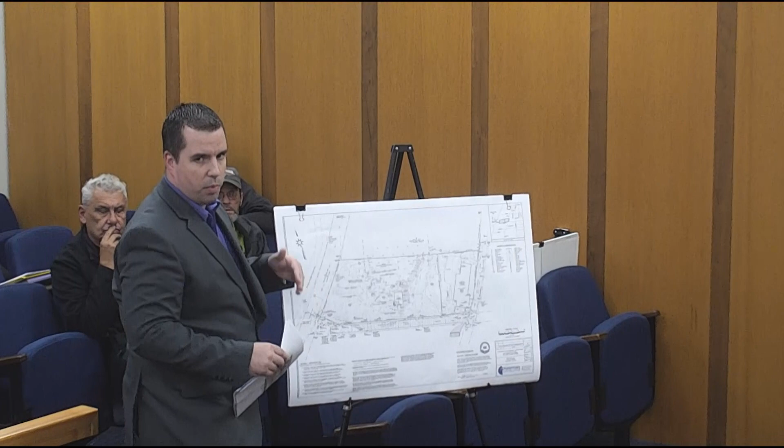I printed out a few prints, if it'd be okay, I'd like to show you some photos and stuff like that. So I have the overall plan, very similar to the plan you probably saw at the last meeting. I wasn't really privy to some of the last meetings, I know George has been here a couple times. I did watch the recording of the last meeting just to get a sense of what was going over, but I can explain some of the work we did since the last meeting.

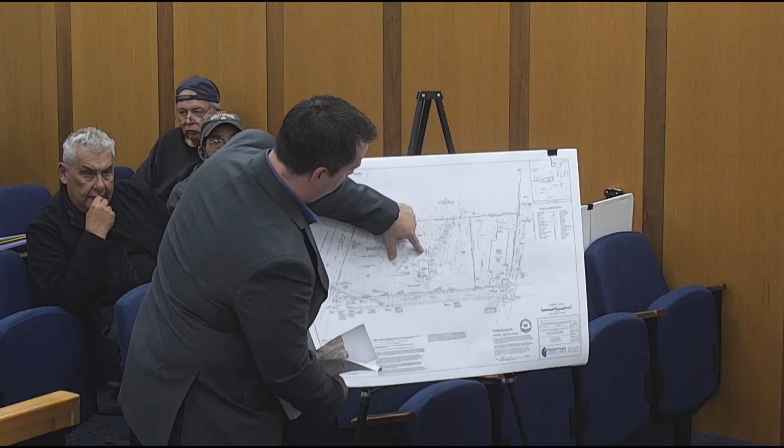Let me turn to a blow up. This is the overall plan. This is where the sealed culvert is, the 30-inch culvert. We did shoot an invert elevation, 29.84. The pipe does head in this direction, kind of towards the corner of the garage, and heads towards this end of the street.

To give you a little history of the property, I do have a photograph from 1939 of the property, just after the '38 hurricane. They did some aerial photography. That garage right there is actually the garage that's still on site. So it's in pretty rough shape, you kind of don't want to go in there.

Most of the time I've been on site, you go in that building, there's probably a foot of standing water all over the place. That culvert is flowing. And the manholes in the street, we've opened all the manholes in the street, the ones that we could find, and those are flowing. I'm of the opinion that it's tied into the city drainage.

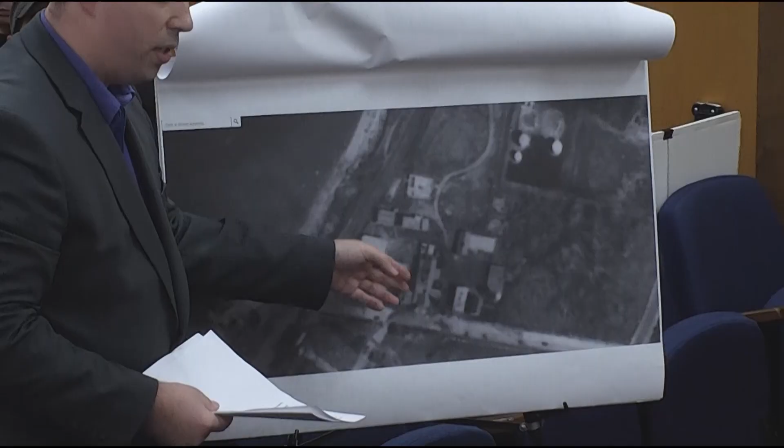We didn't find any kind of outlets on site anywhere. We didn't find any kind of outfalls at the beach. Back in 2017, we did locate that stone culvert under the railroad tracks, a blow up of it right there. I do have a photograph of that.

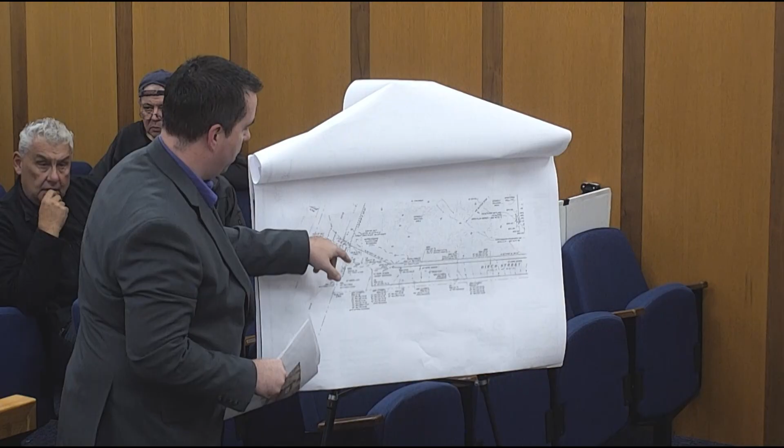At the time, you can see the 20 contour. It's kind of like a bowl in there with a low spot in the middle. At the time, this was around 11.8, going out was around 11.5. That grade's up around 20 now.

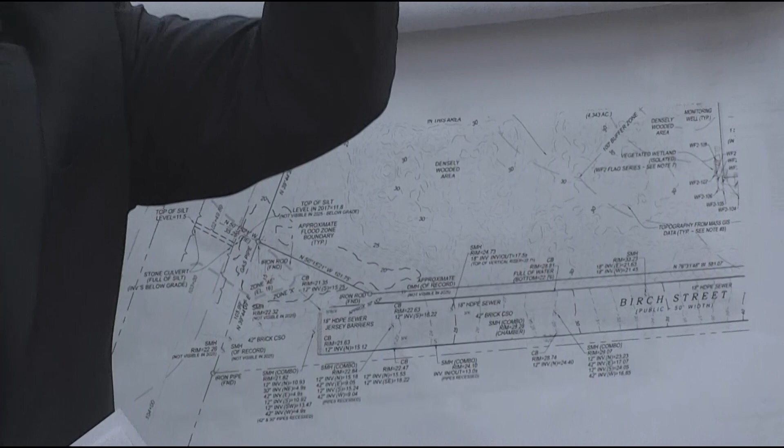I remember when we were out there in 2017, you could walk up to the railroad tracks and probably 10 feet above your head was the top of that railroad wall. And you can see that culvert. I don't know the size of it, maybe a 48-inch culvert, but there was probably only about 6 to 8 inches of it showing. It was all silted in, you couldn't even get anything underneath it.

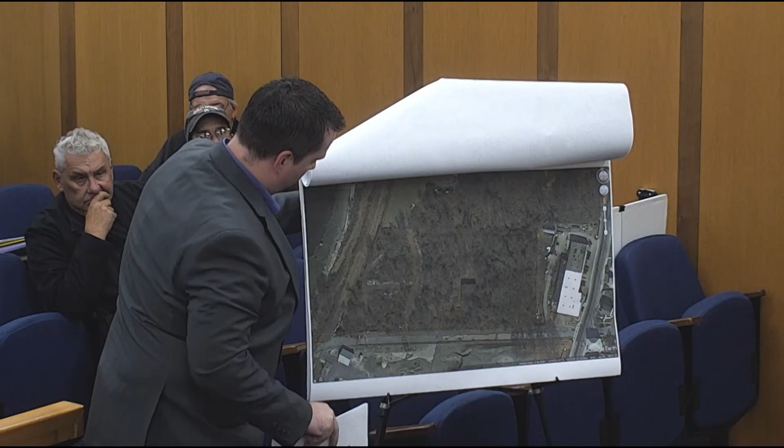I have some photographs of that. Now you go out there, and you can stand at the top. There's riprap that travels that whole area, and you can pretty much sit on that railroad track wall, when before it was 10 feet above your head. So you can see, that was 2018. Our survey was done at the end of 2017 or so.

We show the gas line. You can see in the photograph here, you can actually see that stone right there. That's the culvert that goes underneath.

And then around 2019, you can see all that riprap in there. So that whole area was all filled in along with the grades within Birch Street. A lot of the manholes we show on the plan that are off-site towards the water are actually well below grade now, by some areas by feet.

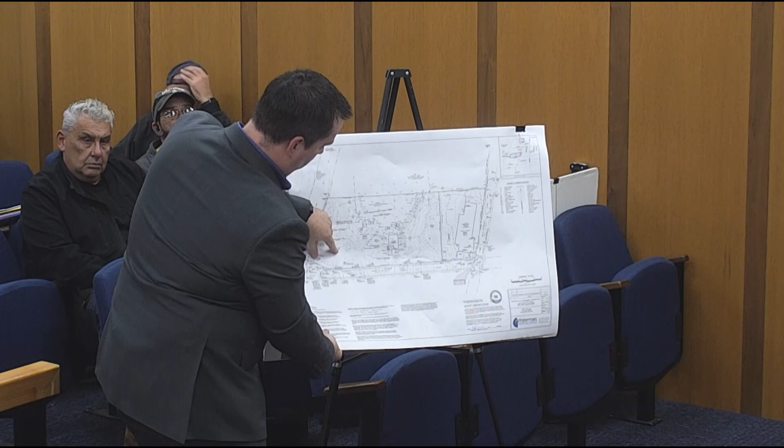This is the manhole behind the Jersey barriers. There's a manhole close to being on site. It's tough to tell if it's on site or within the street right of way itself. In this area, it's shown on those city drainage plans for the sewer separation for the CSO project. We staked out the location of that manhole for them to poke around and see if they could find it. They weren't able to find it.

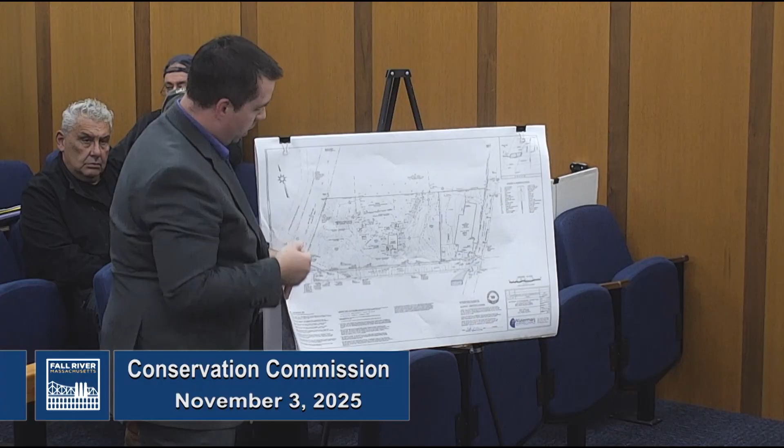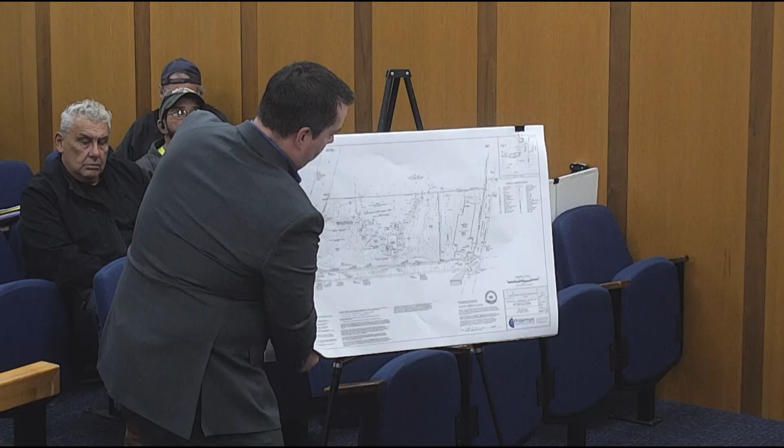Looking in the manhole behind the Jersey barriers, that's what it looks like. There's a pipe that comes this way, a pipe that comes this way - these are the two pipes from the catch basins in the street. And supposedly there's another pipe that comes from this direction. But this is atypical, usually that's nice and wide open so you can see what's going on. It almost looks like a structure was put on that, like Fred said, and kind of just smashed out the middle of it.

So I think the whole purpose of this in general is just to give you a sense. Those are some photographs of that gas pipe from 2017. That riprap and the grade that's out there now is well up into here somewhere. These railroad tracks that are there now, you can hardly find them. You're up to brush like this, and a lot of this area has all been filled in.

Get a picture of what it looks like now - this is what it looks like before, and that's a photograph now, same angle. You can't even see where that culvert is. That culvert's probably 10 feet below grade in that location.

So the whole purpose of the ANRAD in general is we intend to go out there and stake these 100-foot limits of the buffer zone. The purpose of that is so that some of those concrete slabs, and some of that you can see in a current aerial photo - there's a homeless encampment out there now.

And this is just all debris, clothes, shoes, shopping carts. You walk out there and you're up to your knees in just trash. Not really excavation, but more just cleaning it up, getting that trash out of there so you can actually see the ground and get to those grades.

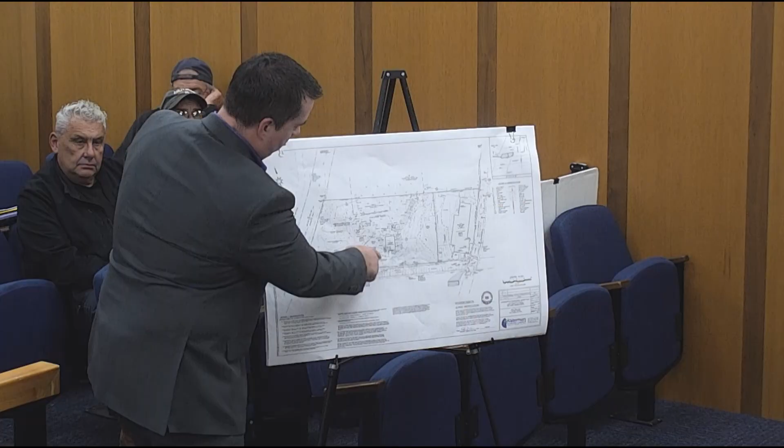That 100-foot buffer is probably in here somewhere. So if we verify the location with the ANRAD, we can stake that 100-foot buffer, the limits of it, and some of that trash and debris can get cleaned out.

I still think there's some utility investigation that has to get done. I know some of those guys aren't cheap to get out there with their equipment, whether it's CCTV or GPR - you wouldn't be able to GPR over those concrete slabs and all that material out there. So it'd be nice to get some of that material out there and have an area for them to bring their machinery down and try to see where that pipe goes, whether it's from that manhole or from that culvert, and camera it.

I know we've worked on some projects in the past where some of those lines have cutters on them - it could be broken pipe, root balls, anything like that. They'd be able to cut through that and see where that pipe heads.

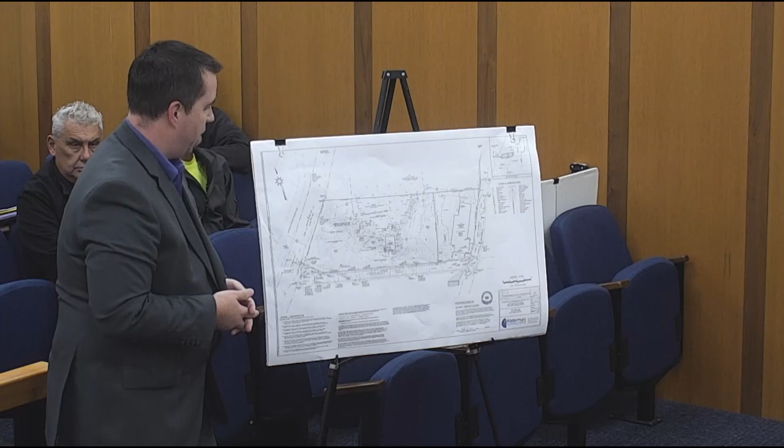So I think us being able to stake those buffer lines is important to make sure we stay out of the buffer zone with any of that cleanup, and for those guys to be able to get in there with their equipment and do that stuff. So that's kind of the extent of it.

And if there's any questions, I'd be happy to answer. Any questions on the board? Any questions in the audience at all? Okay.

Mr. Chairman, I guess if I may, the presentation he made kind of gives everyone an idea of the conditions we're up against. It's easy to say it, but Brad's been out there, and the photos are pretty indicative of what's going on out there.

So I guess tonight, I know we have questions. I'm not sure we can answer all the questions tonight about the culvert, except that in my mind, it doesn't exist as it looks, we talked about it before. And I think I've answered the question about the steel pipe. Again, I don't know where the water goes.

So I guess to wrap it up is to see if we can get an ANRAD tonight to set the buffer zone. I believe the last time we were here, I brought Beta to come along if there's any questions on the wetland flag and stuff like that, to answer any questions there.

So there's no question on the BVW line. I've said that multiple times. What I did question was the presence of isolated land subject to flooding, which we still don't know if it occurs or not. So even though there's not an open culvert, if water is still getting underneath that railroad, it's still considered a culvert, and that would eliminate the isolated land subject to flooding. So that's still a question that we need answered.

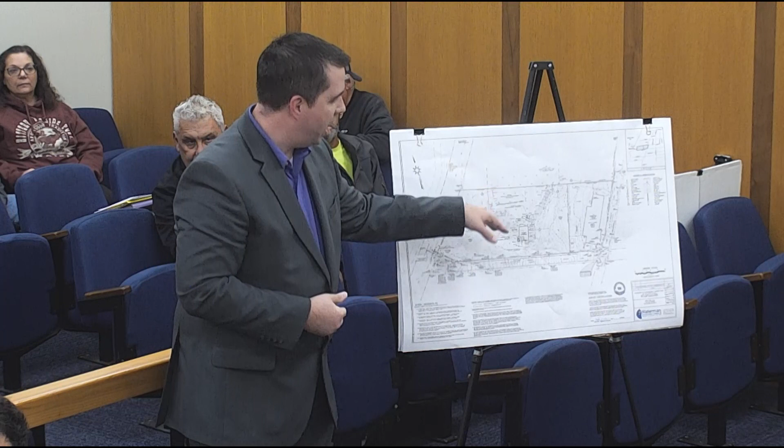So the culverted work - because you're telling us that you need to go in and clean so that you can get a machine to go do the camera testing, so that you can answer our question about where is it - well, just to follow it from this 30-inch manhole culvert, to follow it from the manhole heading in, not necessarily to go in here, but to follow it from the manhole. So you don't need to clear it at all if you can get a camera down in the manhole.

I agree. So sending a laborer down to say, hey, what's down there, is different than getting a camera test. I was just thinking at the bottom of the manhole, if they were able to go 20 feet, would they have to go any further on site outside the 100-foot? They might not be able to do that.

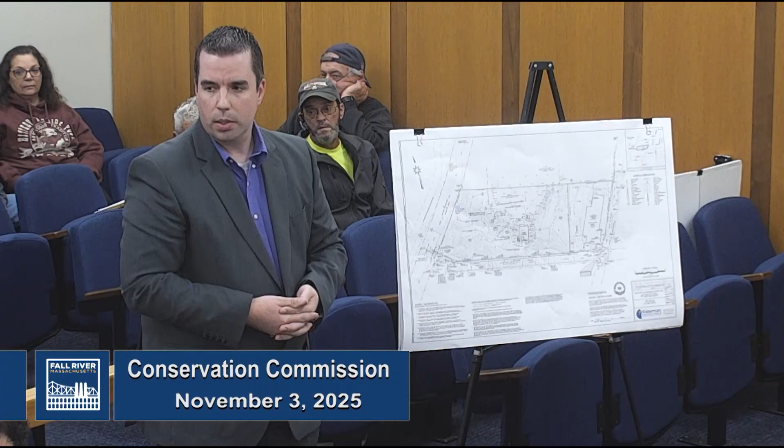I guess, if I may - the buffer zone that's shown on this drawing, is it safe to say that you'll accept that buffer zone the way it is now, the way it's drawn? If it's 100 feet from the bordering vegetated wetland - yeah, and if there's a culverted connection, it can't just be that we don't know where the water goes.

And clarification that the existing culvert under the rail line still exists in some form or fashion and is allowing water through, so that we don't have an isolated land subject to flooding. I don't think my questions have changed since the first presentation. My understanding is, and I heard your marching orders, but was sometimes not able to march for one reason or another, whether it's a misunderstanding or the fact that it's physically impossible.

So if the culvert that you're talking about - even though say it's only a foot - the one under the rail line, if it's allowing water through it, then it's allowing water through.

It doesn't have to be a cleared culvert. There are some culverts that are stacked stone, and it has to go through the crevices of stone. Exactly, I know that.

So I think even cammering that line, is that worth it at this step? It's probably worth it to do the RDA, get clearance to clear further, and then do the cammering once we get the RDA. My understanding is that's right, because I'm concerned that there's something wrong in that line.

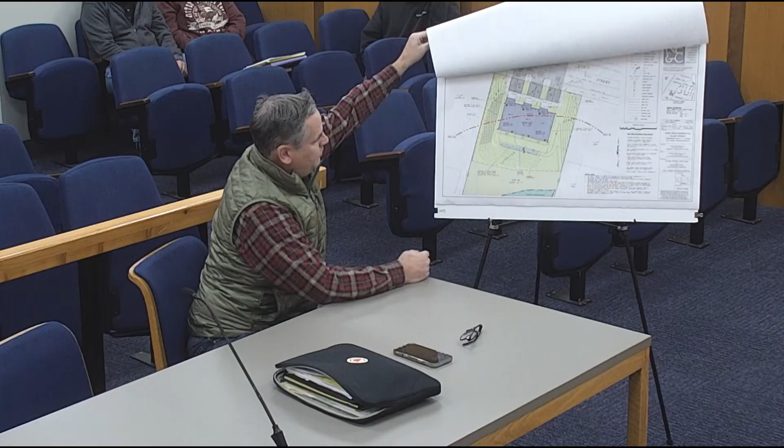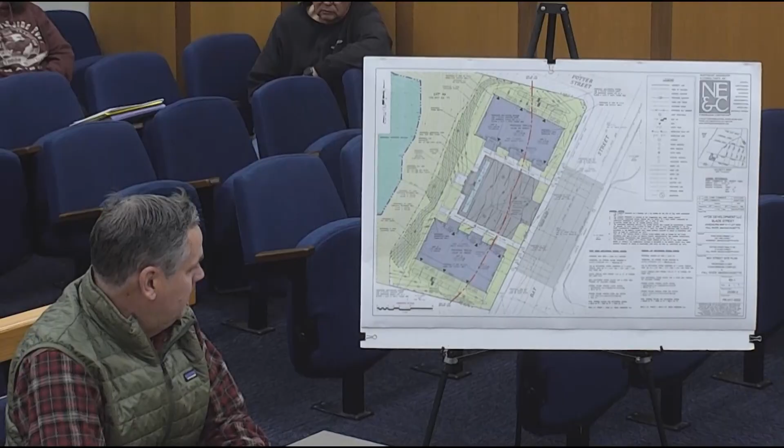On the other part of this project off of Slade Street, there were no significant changes, other than the fact that we did go out and do a test pit in the area where the drainage system's going. As a result of the information we obtained there, we did have to add one additional Cultec chamber because the infiltration rate in this particular area was not as anticipated as what we had up here. The test pits that we did up at the top, which we did 3 of them, all revealed that the infiltration rate that we were using was adequate for this section.

So we really didn't make any changes to the drainage system in this area. Those were the changes that were made to the plan. Happy to answer any questions the commission might have.

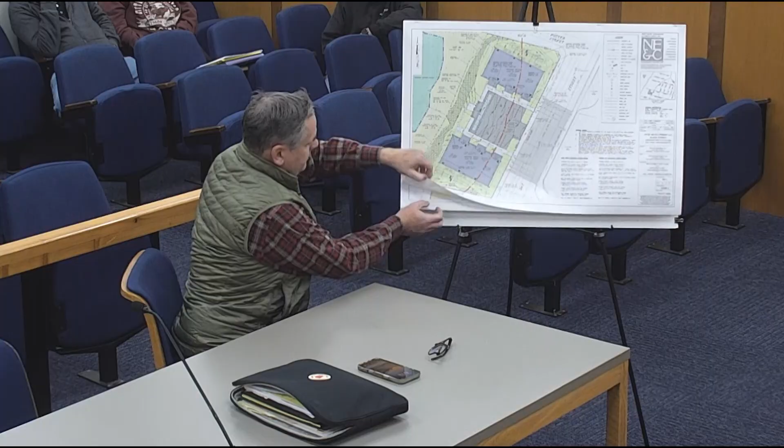How many test pits in this particular process? We did three in this location. We had three different drainage systems: a rooftop drainage system, one for the parking area, and another rooftop in that location. And on the Slade Street area, we did one in the area of the drainage system. So we have four separate drainage systems, all four had test pits done.

Anyone in the audience for this? Okay, can I have a motion for an order of conditions with the conditioned site plan review approved? So moved. Second. All in favor? All right, thank you.

Next, notice of intent SE-24-861, Baron Wakowski, Calhale of NEPC National Grid, Weaver Cove Industrial Park LLC, existing overhead transmission line, right-of-way. Project location: multiple locations. Filed by Erica Marcelo, Power Engineering Consultant, on behalf of the applicant. The project is located in a section of existing right-of-way from Sykes Road substation to the Somerset Fall River municipal boundaries over the Taunton River. The project consists of separation of existing N12 and M13 transmission lines and structures within the existing right-of-way.

So this, if you remember, is the power line construction that runs hand in hand with the Weaver's Cove parcel. We had made it clear to National Grid at the time that the same way we need their signature on Weaver's Cove's application, we also need Weaver's Cove's signature on their application. They have not been able to provide that as of yet. I did receive email correspondence from them today asking that the matter be tabled, that they have no new information to provide at this time.

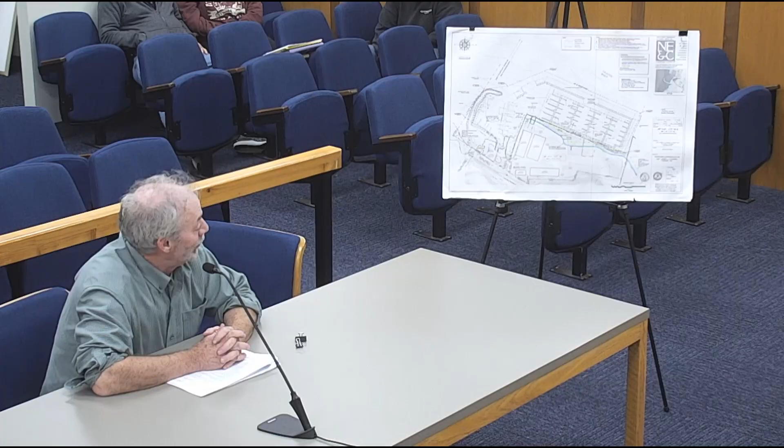We think that's a good way of doing it, because we weren't sure how we should approach this commission, or how we should license the facility, since it is under common ownership, although considered 2 separate lots, so to speak. Any questions?

No, we have everything. So Dan, they have all these recommendations, correct? I haven't reviewed it to see if those have been responded to. Looking at it, I can see that some of them have been addressed.

One of the questions, and maybe Sean can just answer this tonight, on the northerly property boundary, why does the riparian right not extend at the same bearing as the property line?

There are 2 reasons for this. One is, on a riparian line, you typically look at historic high water, and the best historic high water we had was an old railroad plan from 1905. Before that, if anybody knew what was going on there, I'd gladly take their input. But it's typically perpendicular to 2 things, the channel line or the shoreline.

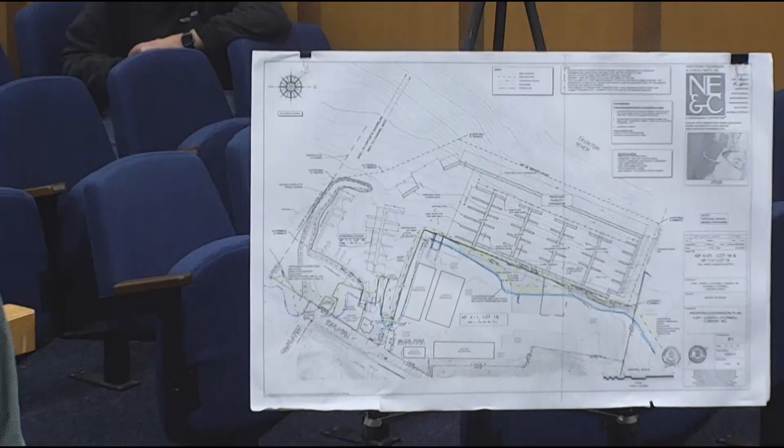Typically on the ocean, it's perpendicular to the shoreline because there's no channel. In this particular case, there is a channel out there, albeit 690 feet to the buoy that marks the channel. And there's historic filling on an unlicensed, unpermitted facility to the north of us, so they're actually sticking into our riparian right for the historic line. If you drew a line perpendicular to the historic water, it would go this way, which would cut off the corner of that existing solid filled jetty, essentially.

We're not looking to do that. Riparian rights are not lines of ownership. They're a right to enter and access a property that is on the water, and there are several different ways of doing it.

We tried to keep back the required 25 feet from the riparian line, but technically what we did was the property line runs parallel or coincides with that solid fill jetty. That's why I think it's built the way it is. And from that point, we go perpendicular to the channel.

So is there a channel? There is a channel, but it's not an Army Corps or regulated channel. One of the questions I will have is, what channel line are you drawing this perpendicular to? We're drawing it perpendicular to the marked buoy channel out there.

Right, but that's not shown here. Well, we had talked about this, I said if there is some channel line, then at least show what this bearing is to. So if it's perpendicular to the channel, then just say perpendicular to the channel, and show the foreshortened line to the channel. Okay, something like that. Otherwise, it should be the extension of the property line.

The line to the south is even trickier because that one ended up being the same bearing as the property line. Well, it is because it's perpendicular to the shoreline, which is the historic high water that was filled in when they built River Street. The railroad, when they built River Street to provide access for all these properties below the railroad to North Main Street, filled in the cove that was there.

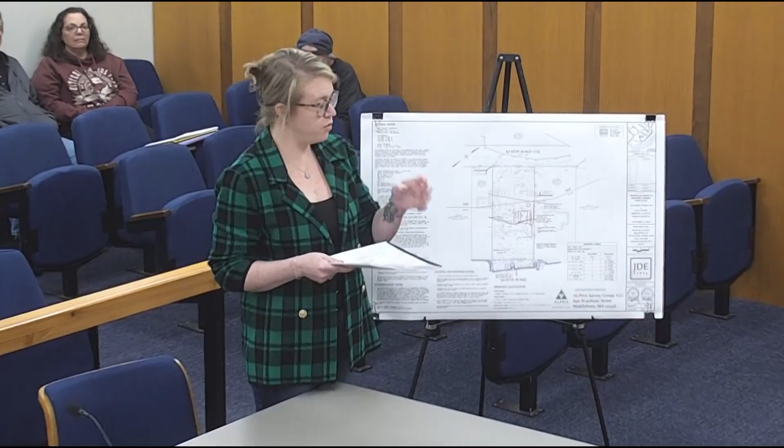The site contains a buffer zone. There are very small patches of wetland flags. The wetland line was delineated by Brad Holmes - I'm sure you're all very familiar with Brad Holmes. It is abutting Sawdy Pond, so there is a little inland bank, and there's also wetlands across the street, but that really doesn't come into play with anything we're doing here.

It is in FEMA flood zone A, and based on the research I've done and the previous LOMAs filed on Sawdy Pond Ave, we established the BFE to be about 139, even though it doesn't call that out on the FEMA site. They have approved and removed quite a few structures based on that. The 139 doesn't even - right here is 139.6, just to give you an idea - 139.48, so it doesn't even come up onto the property. The next go around, once this is built, we're going to be filing a LOMA for them as well.

We have included the sediment controls around here to help with that. There are roof drains directed into a small infiltration trench there.

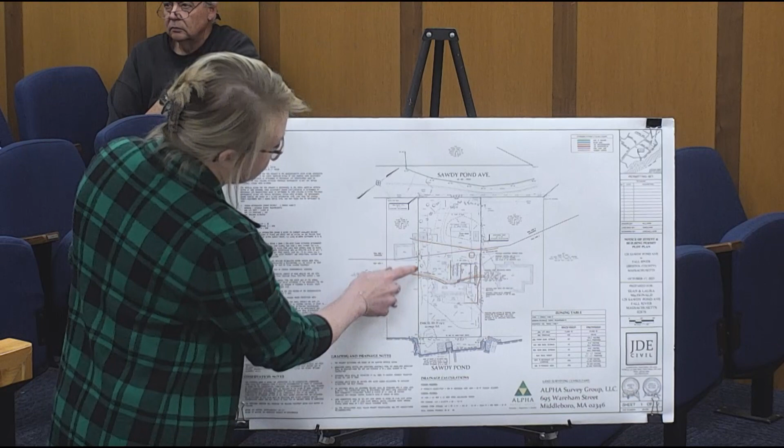The septic system is actually sized for 3 bedrooms, so we're only adding 1 bedroom. That's not going to be an increase in use, so we don't need to change the septic system. That's just going to remain as is, and there's a proposed dewatering sediment basin there.

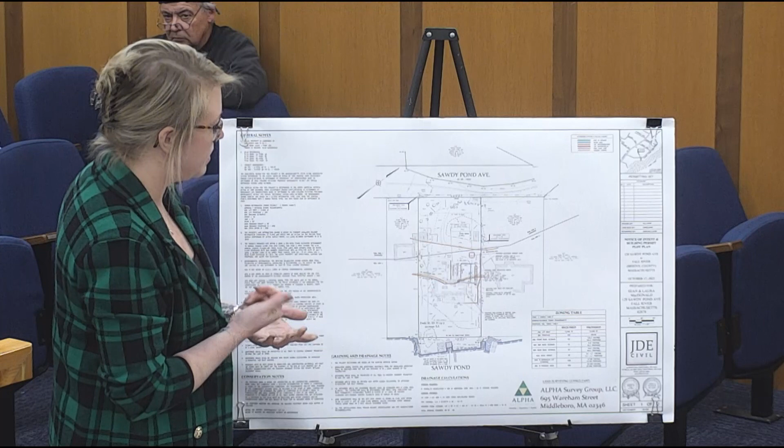I didn't do a construction exit or entrance for this, strictly because it's a gravel driveway, so it's already serving its own purpose. It's pretty straightforward, there's no proposed grading. It's going to be a slab, set at the same elevation as the existing home. Do they have a basement now? No, just curious, no.

With that, you'll see in my comments that I recommend the issuance of the order, with 2 special conditions: site plan review approval and Board of Health approval. I'm not sure who I emailed the site plan review to, but one of the conditions was could you send in floor plans, existing and proposed?

We do have those, but we don't need them here. I didn't send them in for this review, different from the other ones. You're going to see it 2 more times yet before we get to you.

Just to answer your one quick question, you did have a question about the concrete cover back there. Yeah, so that was the old cesspool, prior to these owners now. Nothing going into it, no laundry going in there, nothing.

Nothing coming out of it. They didn't make them get rid of it back then, huh? No, they didn't, and it's probably completely dried out. I think Jim the surveyor said they couldn't even get the cover up, it's like a huge, over a foot thick.

Might want to fill it, just for safety purposes. It could very well be, but they couldn't pop the cover to do it. Some 2-legged animals will find a way to open it and fall in it. Well, they have the machines out there, it might not be a bad idea to see what's down there, sometimes they used to tie in laundry to those, and you want to be careful that it still isn't tied in.

Yeah, that was my question, but again, separate agency from this one, but I'll end up reviewing it for the Board of Health too. So no, it was very well done, appreciate it. Thank you very much.